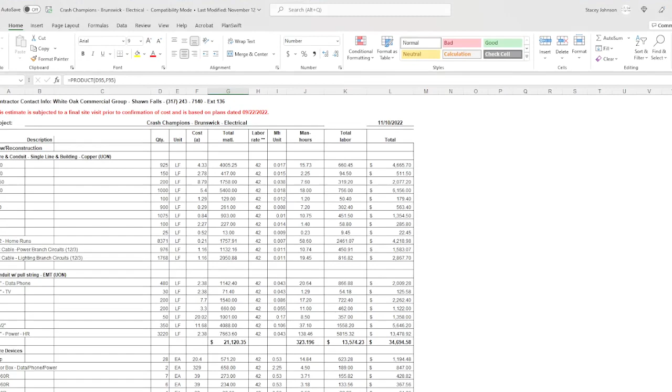Okay, and so you need a good counting tool and you need a good segment tool to measure lines and lengths. And so we'll look at an actual estimate to show you what you want to think about when you are getting your estimate together. Now, this is the way I represent it, and I've completed electrical estimates, only God knows how many, and electricians like the format because it's very clear. It tells them everything they need to know, and if they know their trade, which they do, they can determine if the numbers that you're giving them are kind of crazy or not, or overboard.

Okay, and so you got to think, number 12 wire, you're always going to have a lot more of that. Because why? Because most of the power components run with 3 number 12s. And so you'll run one length for the conduit, but you got to times that by 3 if we're talking about the home runs. Okay, and so the way we break it down, we have a section for our wire and our conduit.

So all of the wire, even including for the single line, and then MC cable. Most of the branch circuitry can be run with MC cable, whereas all of the home runs, of course, have to be number 12. Or if it's a particular type of mechanical equipment, it's going to tell you that you need 3 number 10s and a number 6, or vice versa, or whatever, and you'll know from that.

Okay, and so we break that down, all the wire, all of the conduit totals by length, and of course we use a cost book to give us the material cost for the wire and the conduit. Now, rest assured that if you use a cost book that's very accurate, like we use Craftsman, our material cost for the wire and the conduit is going to be 5% within local pricing. So, not 5% within what your supplier is going to charge you. Okay, so that's a thing to think about too.

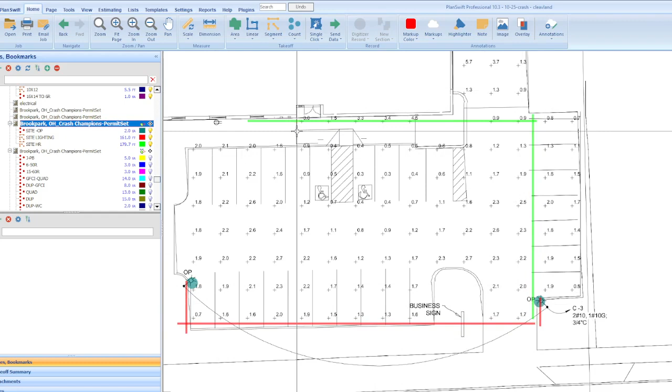But you go to our set. So this one happens to have a site plan. And so, straightforward, this is probably doing too much. They may go zip, zip, from here to that. Who knows? But I do the most. I think that's conservative. But in the real scheme of things, if they have to trench that, they may not trench it again to go there. They may just go back here and then go like that. Who knows? But for the purpose of our estimate, every estimator has to figure out that same thing. So we're going to give it the most leeway.

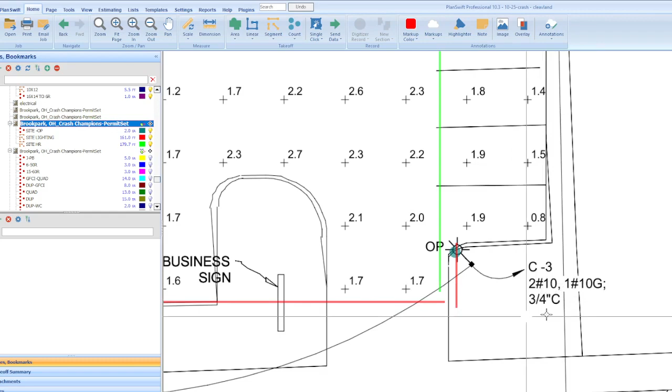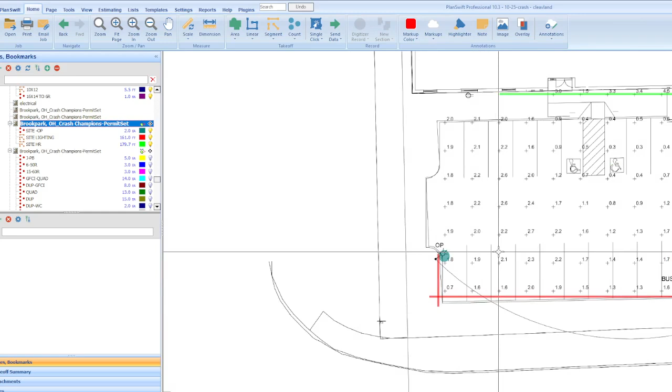Okay? So we know this is underground. We know that's PVC because it's site, right? So we don't have to think twice about that. And we know that it's 3 number 10s and a 3/4 inch PVC. Home run to position number 3 in panel C. So I took it from here, and then once I get into the building, I add whatever additional to wherever the panel is in the building. And you got to account for it coming up, right? PVC to EMT, or rigid, or whatever. So just add like 10%, nothing that's mind-boggling.

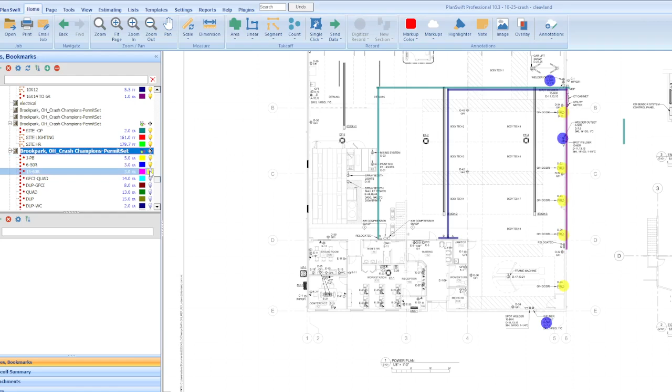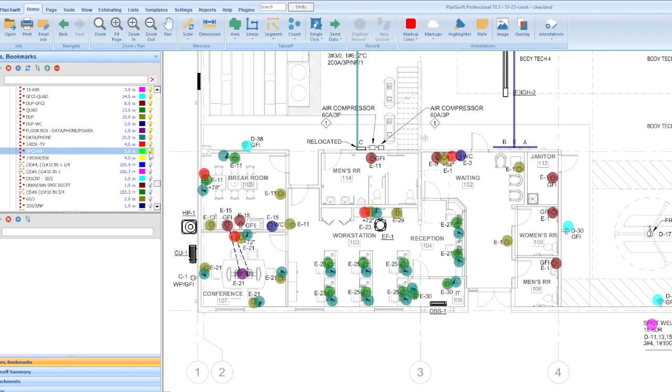Especially for the initial estimate, because you want to bid as much as you can now. But once you win, you want to go back with a fine-tooth comb and say, okay, is everything covered? Now, this is our power plan, and these are all of our outlets and everything. Duplex, right? Phone and data, so I know that's a duplex junction box as opposed to a simplex or a single one. Let's see, fill in everything. This had a lot of bubbles. Okay, so good counting tools are critical.

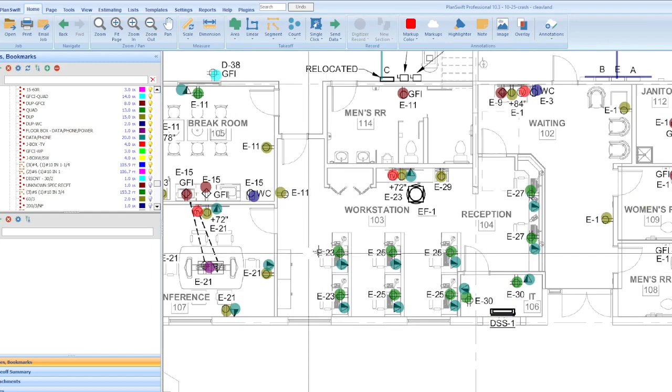Now, when it comes to your branch circuit, you got to look at where everything is connected. These are both going to position 27, panel E, so I could say these are connected here, and they're probably home run to that position, because they're quads. Okay, same thing here. I can run it here, branch circuit, and then I'm going to run an imaginary home run to wherever E is as far as running the wire. Let me see where I have my power wire. I might have done it on a different page. Okay, no, there it is.

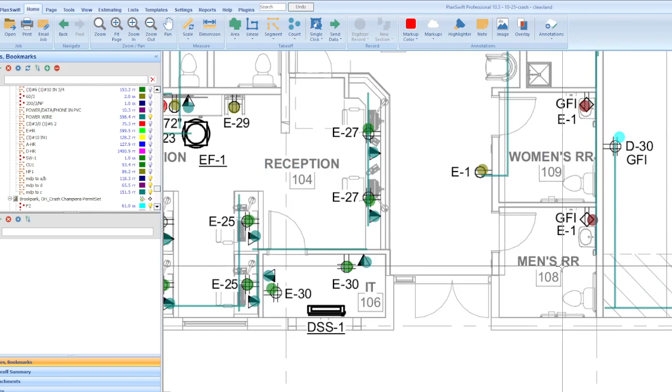See? So things I know are going together to the same position on the panel, I'm going to run those all together, and then I'm going to home run that from that end to wherever relocated C is, and where's E? So normally they'll put everything close. Yeah, here's E, panel A, E, B, and C, and then the disconnects. Okay, so all we can do is make the lines from where the plans say the stuff is, and we're giving it a good representation.

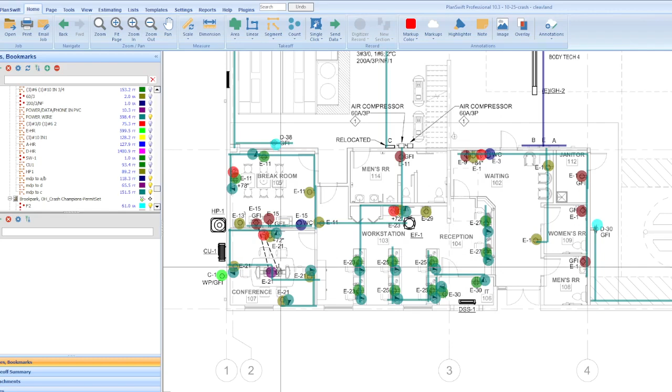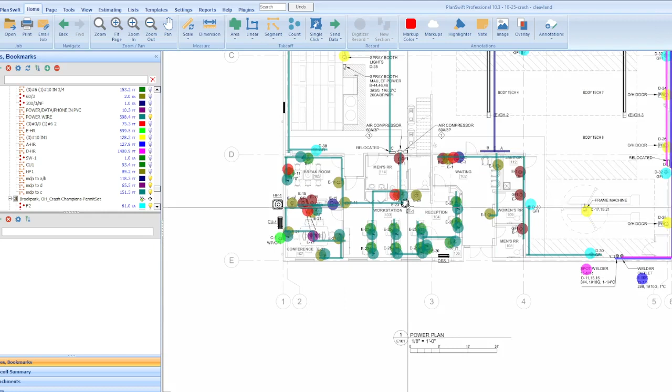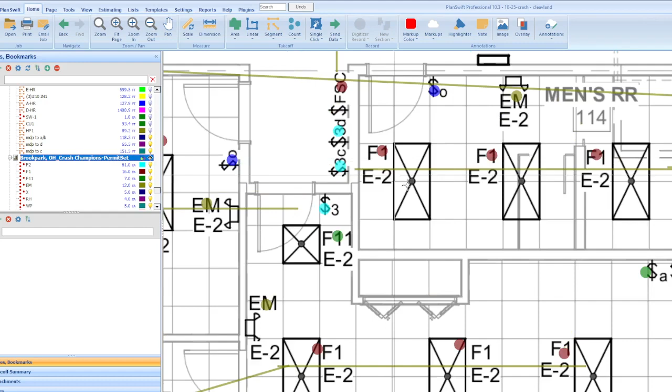We got some underground, so that's going to be PVC, and then we have to transition it up through the new partition. This is a floor box. It shows it on the table, but chances are it's in the floor where the contacts are anyway. Okay, so you have to do all of that. And all your lights, the same thing. You know that they're going to E2, every other one. All of these are going to E2, so you want to maybe put a little more diagonal, add 10 or 20%, because you want to give a good representation if it's not already given.

Because we know these two are going to the same place and then going to that, and they're all going to be connected. So you want to do your best to give a good representation of how the electrician may run the wire. And then I think we added like 10, 15, 25%.

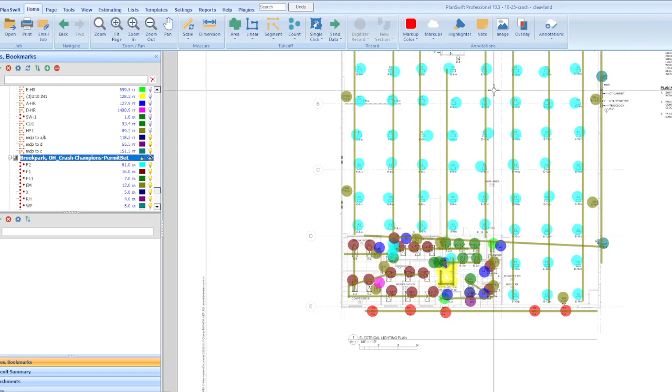Okay, and the electrician will be able to determine if that's a good number, and then we give them the takeoff. It's like, hey, should we be doubling this? Because the person that does the work doesn't know exactly how you should do it.

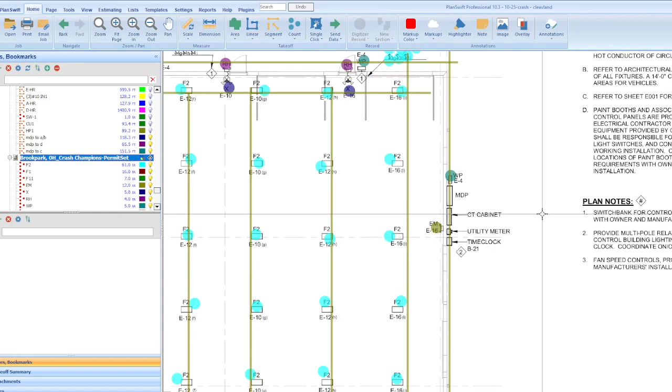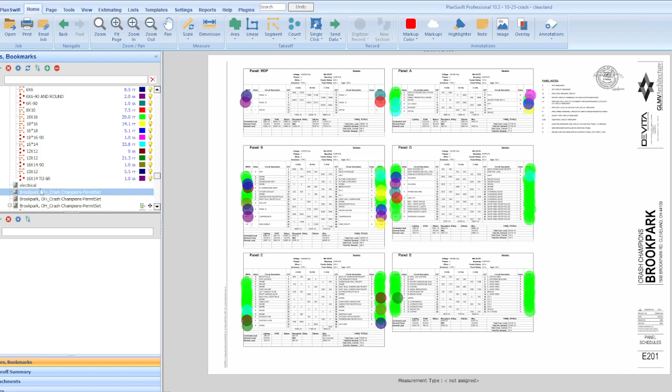Okay, CT cabinet. Now we had to determine for our power how far, because the main distribution panel. And let's go to. We had a good counting tool. Okay. Good counting tool, because you have to count all your breakers. And where's the single line? I think it was maybe in the beginning. So you got to look at the single line and say, okay, where is the single line? Single line, where are you? Okay, well, we're just gonna keep it moving. Where is it? Did I check there already? Of course, no, I did not.

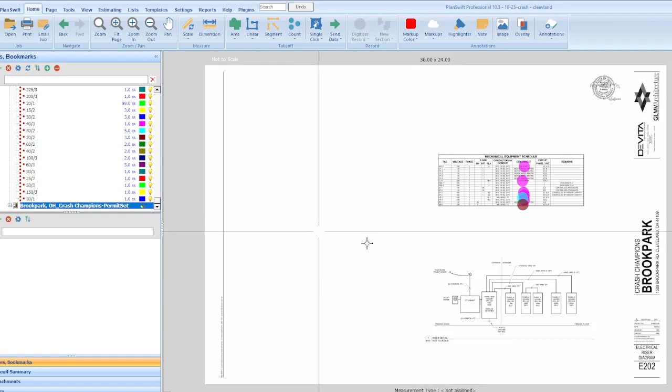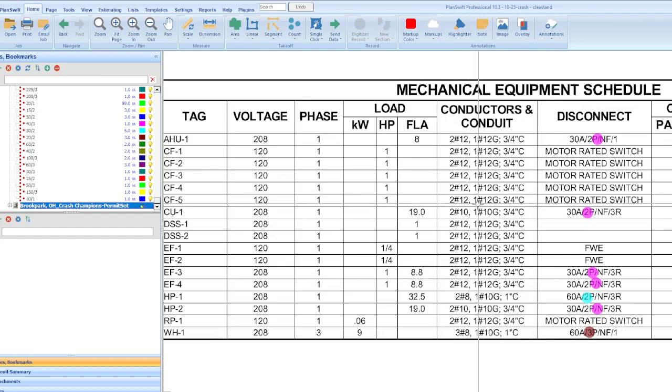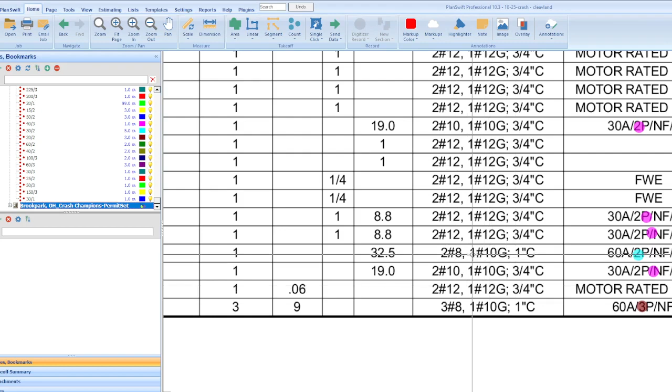Okay, so mechanical equipment, you want to make sure you know any of the home runs, basically, that are not all just number 12. And you want to pull that out, make sure you know where that is and run it to the proper panel. So you'll have all of the wire configurations, number 8s, number 10s. So everything's not always 3 number 12s, depending on the piece of equipment. So that's why they give you that. You got to make sure you pull that out.

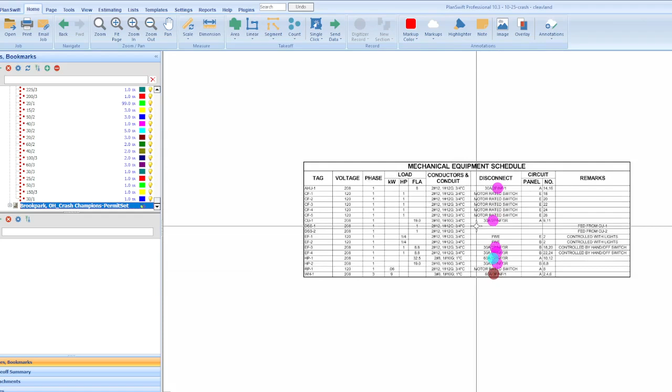Go back to the power plan, figure out where that piece of equipment is, and do your linear measure to the panel that it should be, and then say, okay, it's 3 times that distance, and then 1 times that distance for the number 10, and then a 1-inch conduit.

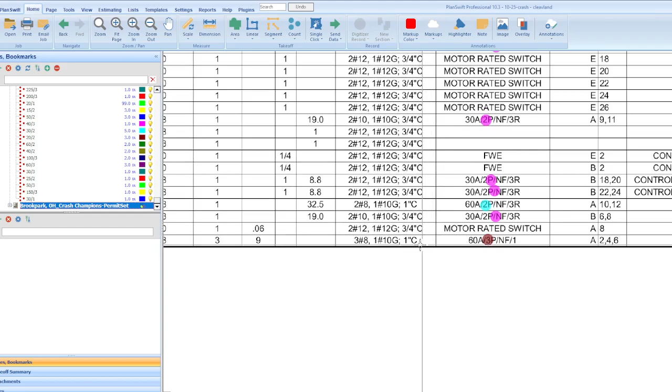Okay, so then for the single line, right, for all of the feeders, you have to physically go to the power plan. We saw that the main distribution panel was on the outside of the building. In relation to panel A, got to find it. So we look here and we say the main distribution panel is connected to A, to B, to C, and to D. And then it looks like B and E are connected. And I got to figure out all of the physical distances for all of the power feeders to know the exact lengths, right?

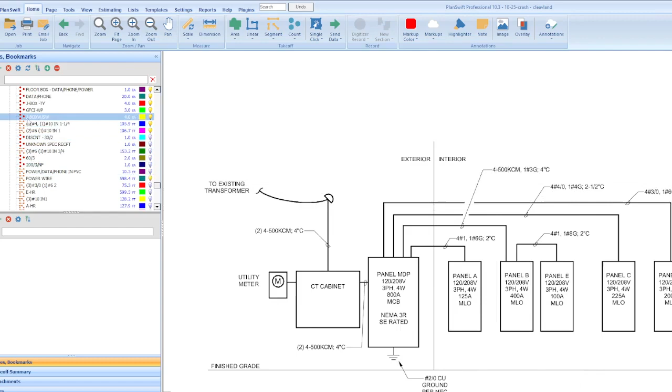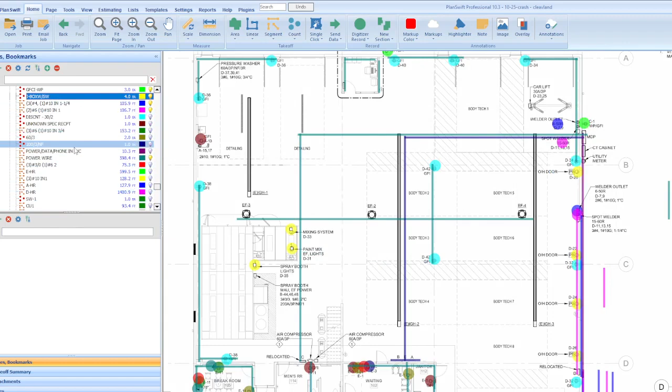So I say, okay, where's the main distribution panel? We just saw it right here. So from there to all of the panels, pretty much. Let's see. There we go. Oh, there already. Main distribution panel. Let me take it out. There we go. Main distribution to A and B is that one. Main distribution to D. Take it out. Is that one. Main distribution to C. Take it out and put it back. Is that one. So now I know those actual lengths. Plus add like 10 feet.

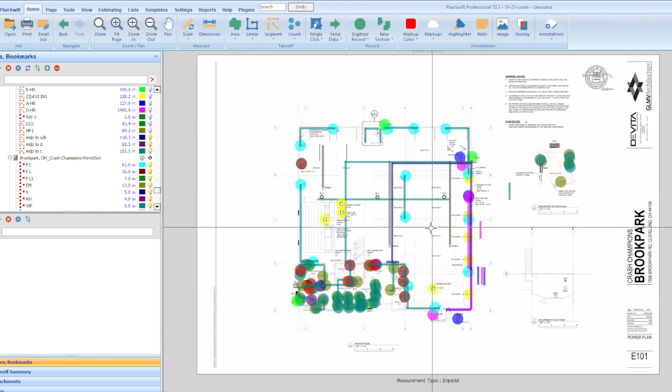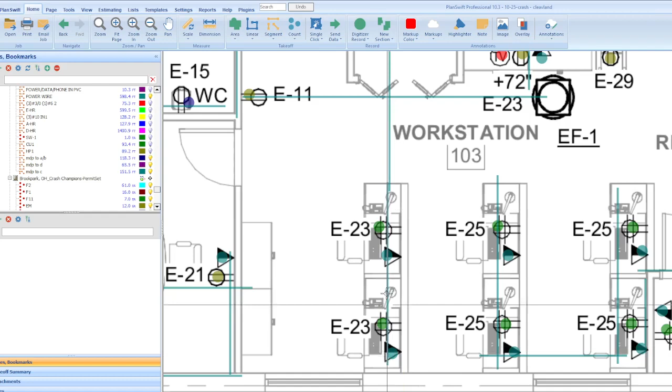Okay, so the basics of electrical estimating is having a real good counting tool and practicing on your conduit lengths. Now, you may get some plans that already have all the lines drawn and you just follow those, but when you don't, just know when it's the power plan, this is telling you that these two outlets are going to the same position in the panel, so the power feeder I can use for that can run together. Same with this, same with that. And these can run together. E25, we did. And then at some point, we're going to imaginary run it to the appropriate panel for the home run, which we did already. Okay, so that's the only tricky part.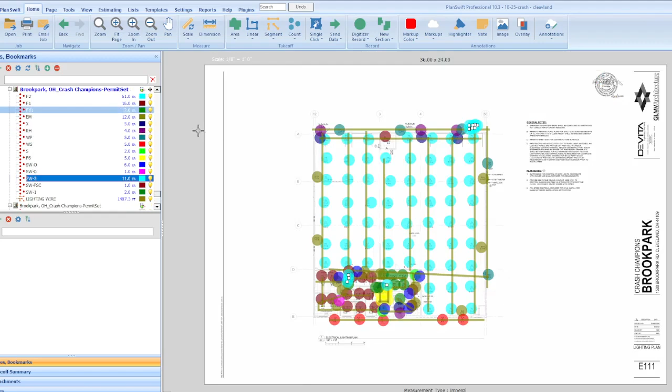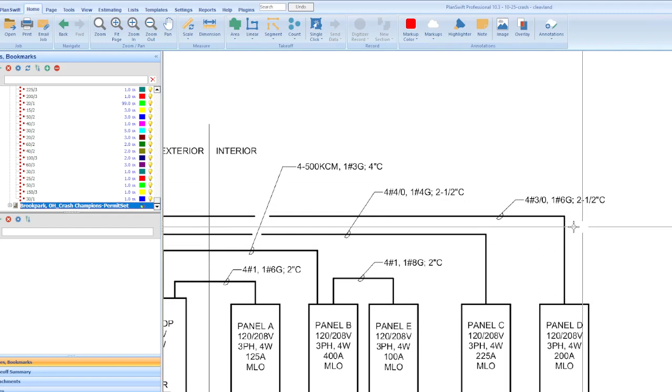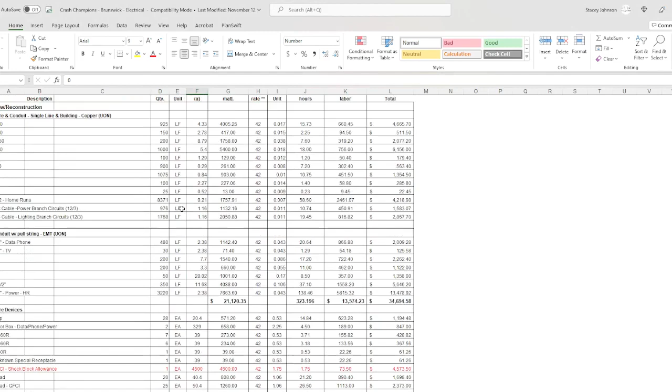Good counting tool. Count all your devices, run all your wire, and pay good attention to your single line because this is where the money is at. So make sure you really measure very well those lengths, because those larger wires are very expensive as opposed to number 12. So you want to be very accurate in your measurements. Okay, and then you have a beautiful estimate all broken down in the way you want, but the way we know our electricians like is all the wiring conduit, all the wiring devices, then everything in the single line and the disconnects. Then we go to the lighting plan and then any additional items.